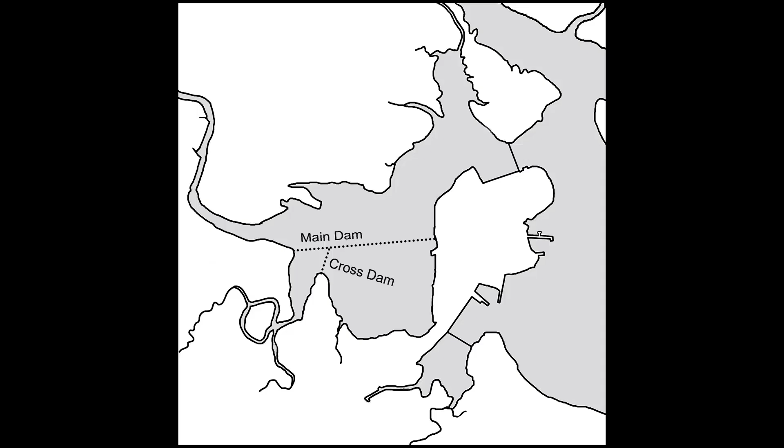The base of this is the John Hales' 1819 map, and I used Photoshop to simulate the layering capabilities of a geographic information system, which we did use to determine areas and distances on georeferenced maps. The historic maps in this show were courtesy of the Leventhal Map Collection at the Boston Public Library.

The highest tides impacted not just the full basin itself, but they spread out over salt hay marshes that were valuable property, and they also represented potential power that could not be built. The leases for power were for a perpetual minimum, not for an occasional maximum.

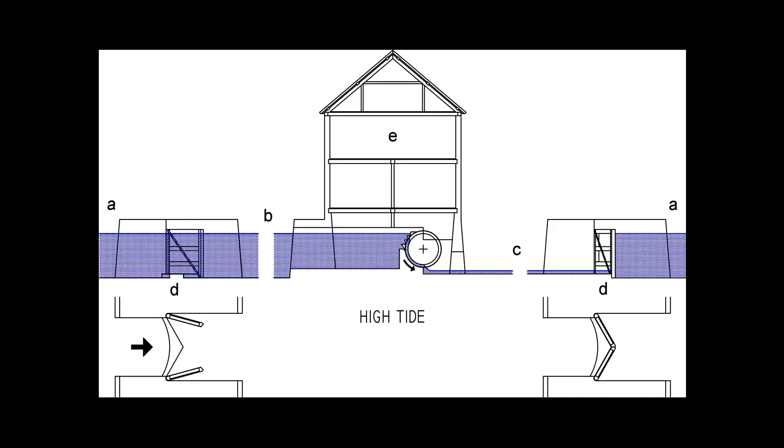Gates to the receiving basin are closed, holding out the high water. Mills will draw water from the full basin and discharge it into the receiving basin throughout the tidal cycle, and this is continuous power. Next, we have ebbing tide.

All the gates are closed, isolating the full and the receiving basin from tide water. And then next, low tide. At low tide, the gates at the receiving basin automatically open because the water level has risen higher than the low tide. So it pushes them open and water discharges or empties.

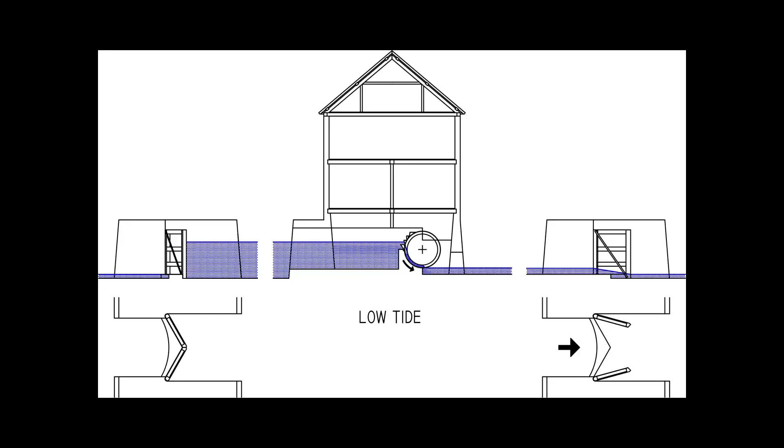The last schematic is of the flooding tide as the tide comes back into the Charles River Basin. Again, the gates are closed, and once the water gets high enough to open these gates, it will replenish the supply in the full basin.

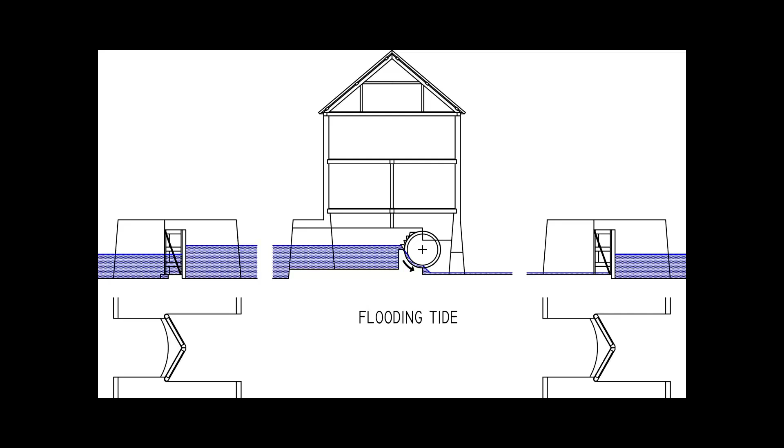Chuck Parrott based this section drawing on a description from engineer E.H. Howe in 1880. Howe had removed some of the dam while building the Fen Park for Frederick Law Olmsted. The large stones, the ones here in the main walls, were Roxbury conglomerate, known locally as pudding stone. There are numerous mentions in the corporation records of specific ledges leased at Parker Hill and Roxbury.

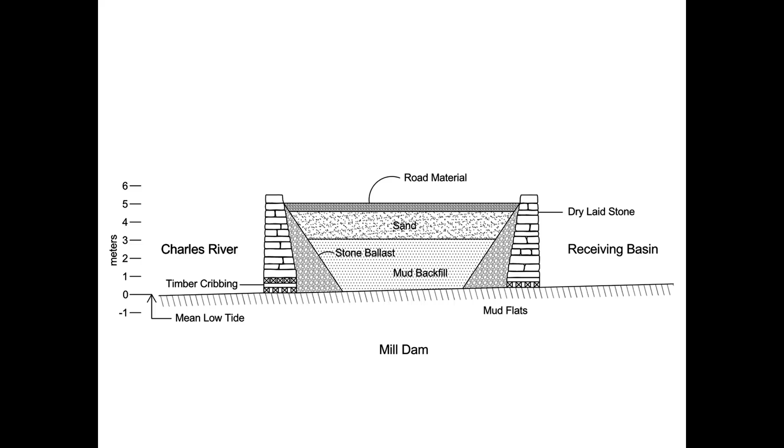Pudding stone formed the walls of the main dam and the foundation of the first mill on the system, a grist mill powered by two breast wheels. It later became a popular stone for major buildings, including many Boston area churches.

Today's Mission Hill neighborhood backs right onto the quarries.

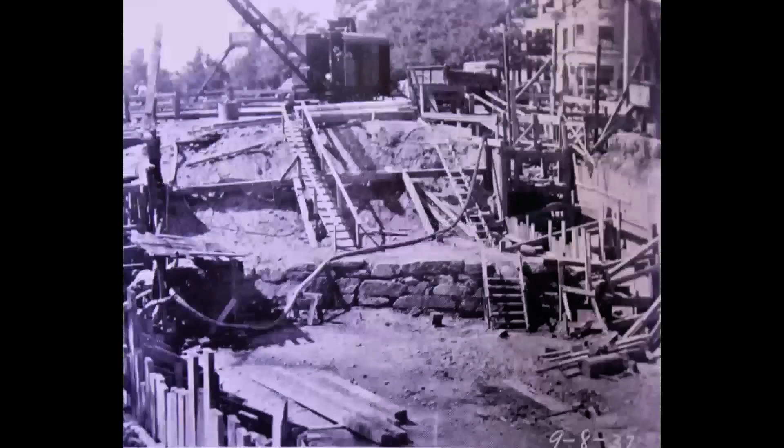In digging the Commonwealth Avenue underpass at Mass Ave, which we saw on the previous map, in 1937, workers uncovered the cross dam, which quickly became the focal point of an article by Wilbur Davis, Boston's chief engineer and an amateur historian. The walls of the dam fit the earlier description by Howe.

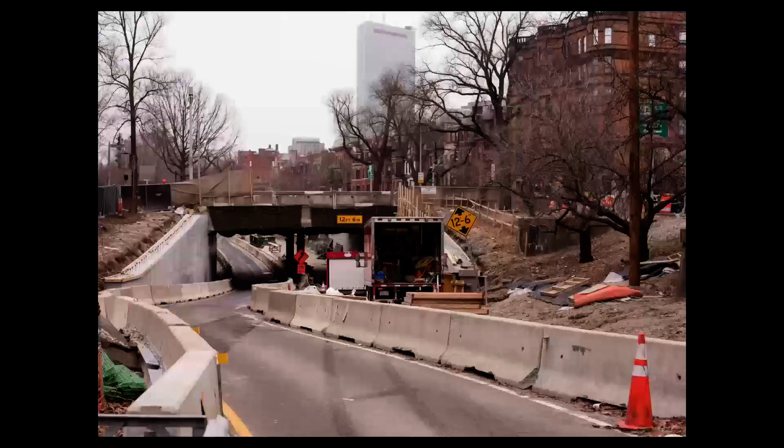Last year, it looked like the city was back at it again. So I went down there, but unfortunately no part of the cross dam was visible.

The area nearby on Beacon Street also showed not a single trace of the former mill dam, which sits below the surface and in fact still carries Beacon Street.

When Davis was doing this project, he got really interested, and he realized that timber cribbing called a grillage sat on the flats and carried the walls. So he actually disassembled some of the grillage, took it out, reassembled it, and took a photograph of it. This is early industrial archaeology before anyone used the term.

Childe Hassam did a painting called Charles River and Beacon Hill in 1892 that showed that same wall.

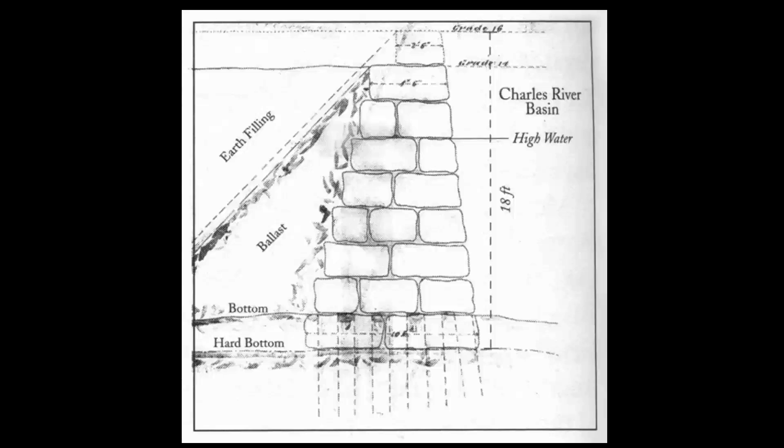And I found this drawing of the seawall from 1872. The important thing here is it actually shows the ballast and exactly how it's stacked against the inner wall. The dimensions, again, are very similar to the actual mill dam. And what's nice about this is you can see it from Storrow Drive, so when you drive by, you can actually see the wall.

Uriah Cotting died in 1819. Rather than give the project to David Moody, who had done the original surveys and was assisting Cotting during construction, the Boston and Roxbury Mill Corporation turned to Loammi Baldwin Jr., a professional engineer whose father had built the Middlesex Canal by 1803. Baldwin was an able man facing a daunting challenge.

He wrote that, quote, 'I was an entire stranger to the plan, manner of working, and mode of accomplishing this magnificent scheme which the company has formed.' This is really when engineering was in its infancy, but he was perfectly willing to take on this project.

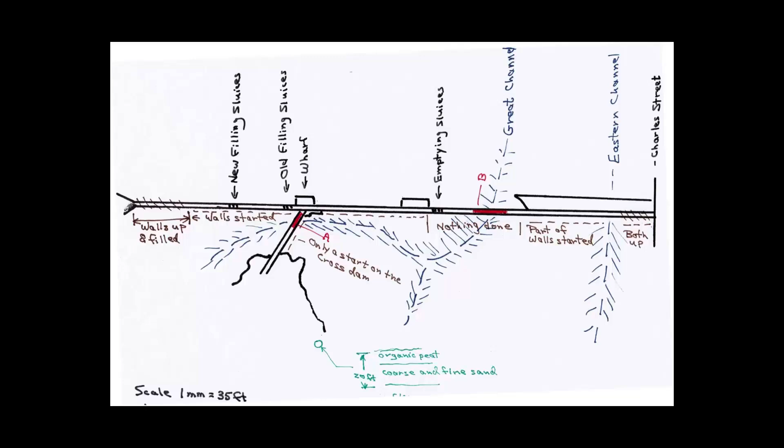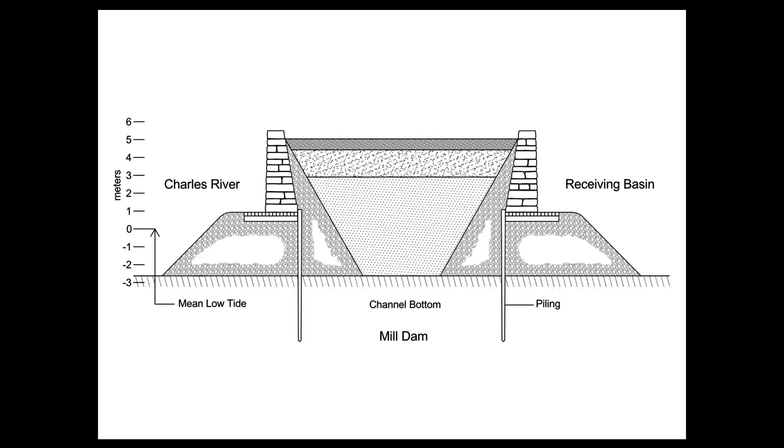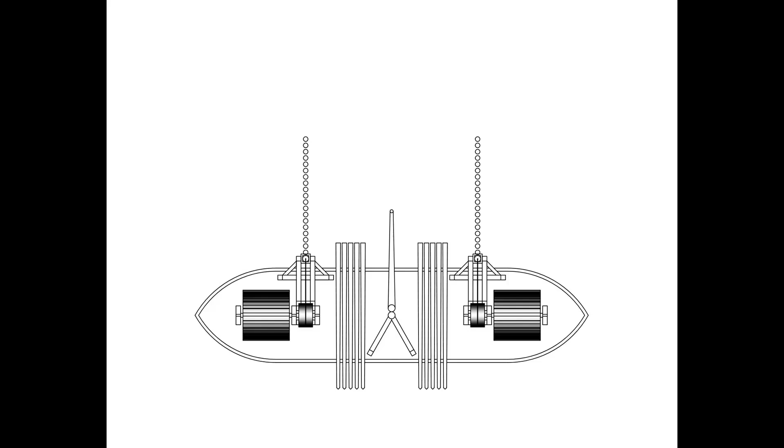We assume that the boat had treadmills because of the lack of space for gangs hauling on lines, and because we know that Baldwin used them later in dockyard construction. In fact, when he did it later, he was criticized for using, quote, freeborn Americans, unquote, with treadmills that had a bad reputation for prison work. But the Irishmen apparently worked on this without any difficulty, and they were able to sink the two lines of piles at once.

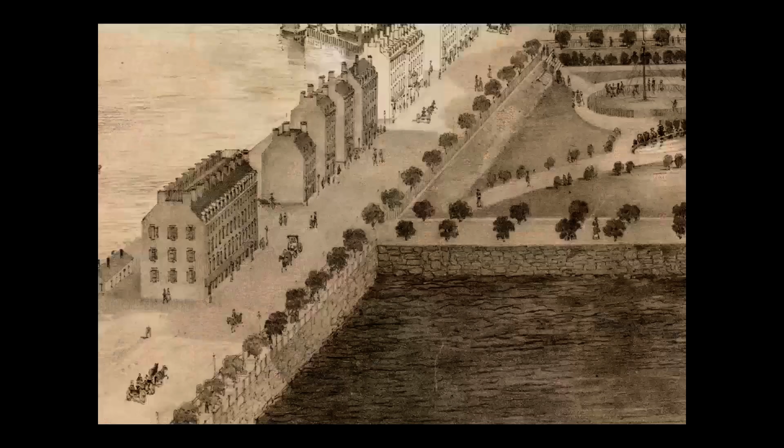There are relatively few images of the dams and of the industries they supported. An 1850 bird's eye view by Bachman has part of the mill dam at the receiving basin. So I zoomed in, and his drawing is highly detailed, and you can actually see the masonry wall of the main dam running under Beacon Street. The tolls from wagons, carriages, and sleighs were more profitable than the Waterpower leases.

And this became a pretty popular place. They had a tavern out there. There was a bathhouse. People would sleigh ride out there in the winter.

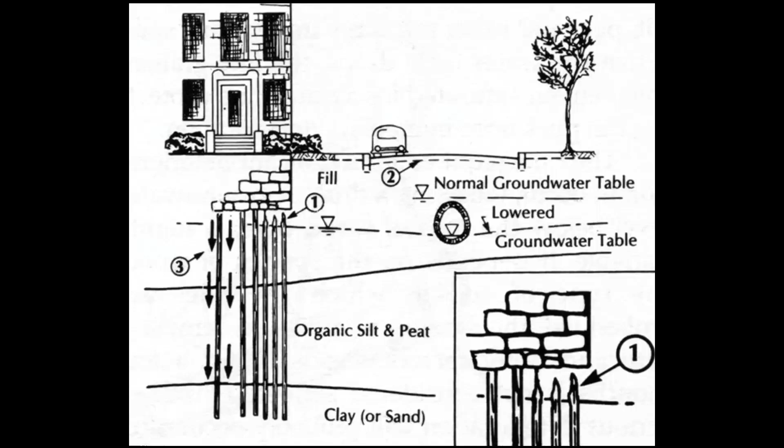We still deal with both the positive and negative legacies of an overlooked tidal power system.

Walter Muir Whitehill, a noted scholar, said that the mill dam in the Back Bay was to change the shape of Boston more completely than any other single undertaking in its history. Yet almost no one walking down Beacon Street in the Back Bay realizes that they're on top of a 1.5-mile tidal power dam that was responsible for the city's largest land-making project.

We need to create awareness of the industrial heritage of the Back Bay and learn more from its underground features. Extensive signage and guided or self-guided tours are among the interpretive possibilities. Whenever construction or infrastructure projects threaten to impact historic features beneath the streets, industrial archaeologists must be there to record and protect precious traces of a forgotten perpetual power system.